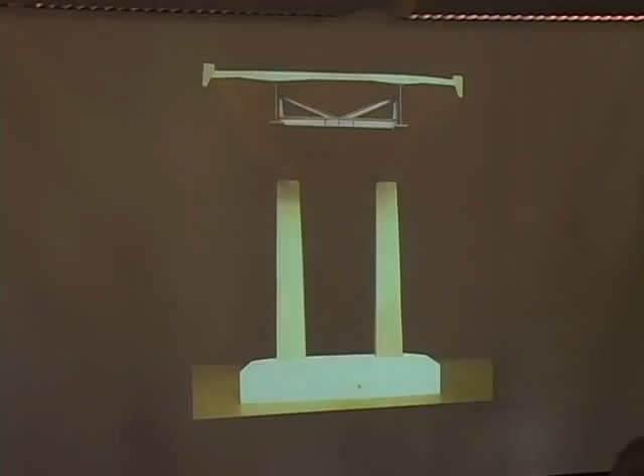Of course, we cared about detailing, but the detailing was in service of the overall concept. It was a disappointment to see the winning project, which was intelligent, cheap, and banal. It raised a public discussion, because I wanted to express that.

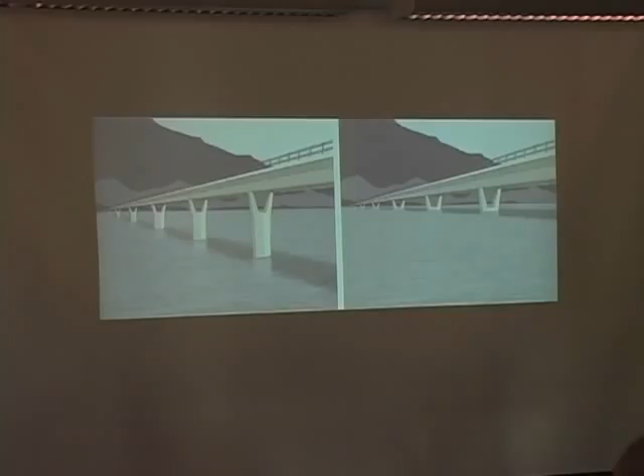And finally, they invited me to say, look, we took such a lot of care, the architect especially, of this bridge, and showed how he sculptured these pillars. And I said, okay, that's all right, but it's not dealing with the main thing. It's not coming towards the concept of the bridge. And this is embellishment of standardized structures. And that's not what is my interest.

So this was also one reason which made me fond of these 70s structures. Another thing, one of the first railway bridges in the Jura Mountains south of Basel. Here, it's not the question of big spans or the notion of transparency so stressed in contemporary bridge building. I think this bridge is like a house. It's a building at the side of the village.

And so the ornamentation of this bridge is another thing than what we have seen before. Because when you build a house, you look for the appropriate ornamentation. And that is what happened here. I think it's interesting also today to think from time to time, should the bridge frame the landscape, as we have seen, or should it be a house?

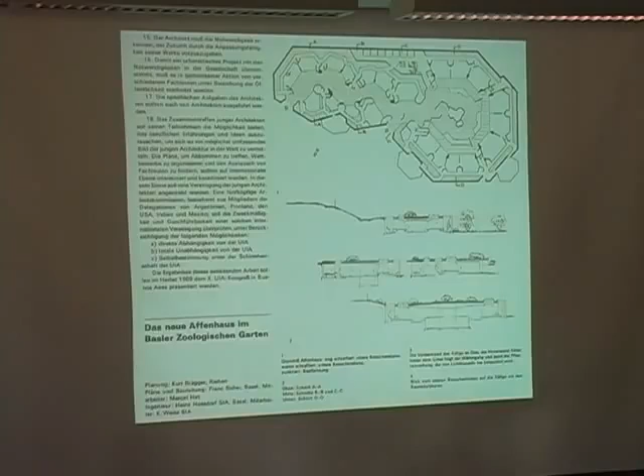There is an existing ape house built not by an architect but by a sculptor, Kurt Brägger. And this is a very interesting house. He had ideas like never come to an ape's apartment in a direct way. By using these 60 degree angles, you always move somehow tangentially towards these ape apartments. But as you see, the outside regions here are very small. And the zoo wants to improve this situation, to enlarge these outside areas. And so we were called to design these.

I tried for once to use a very methodical way. So I made sketches, I made texts. And what you see now is maybe the work of one hour. I just translated my handwritten notes. It's in German, but I can also translate that. But it's really the process how it was.

So I started with the idea of just a skeleton building, using the mesh diagonally as a stiffener of the building. But think about these apes, 200 kilos per gorilla, and they like to move things. So I didn't want to build a thing which will be set in motion by the apes. So we changed the idea to have a stiff diagonal system where the mesh serves only as an infill. But it looked wrong. It looked wrong in scale. It was too constrained, not appropriate.

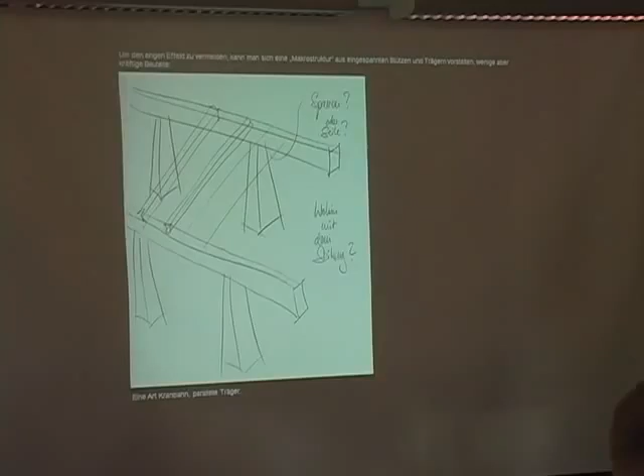So I changed to a macro structure. To say, make a few very strong elements out of it. Like frames, pillars, girders, rafters. But then why do you need rafters? It's not a house. You have this mesh. Leave this away. But then you have a horizontal tension force coming out from the mesh, so it makes sense to incline the outer girders and to anchor this mesh vertically downwards. But we have avoided the rafters.

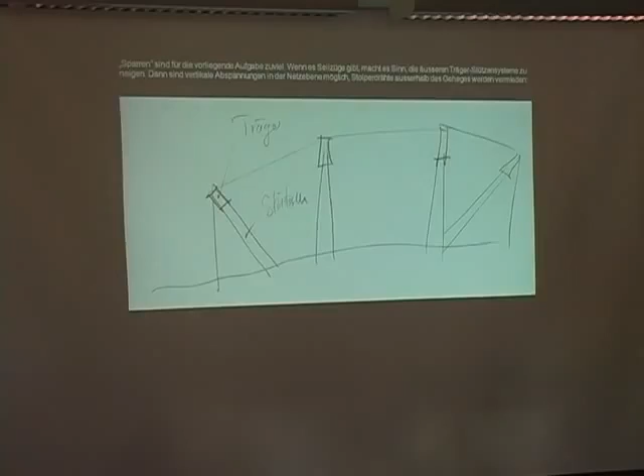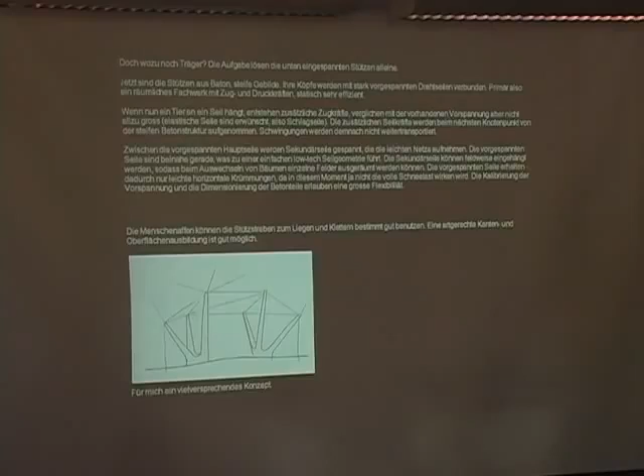Why do you need these girders? You can carry the mesh at different points. So finally, you have like fingers. You could do these fingers out of concrete. So this is a stiff element which cannot be set in vibration by the apes. And then I had the feeling that's something that works. We have come to an end. So we had to make the concept precise.

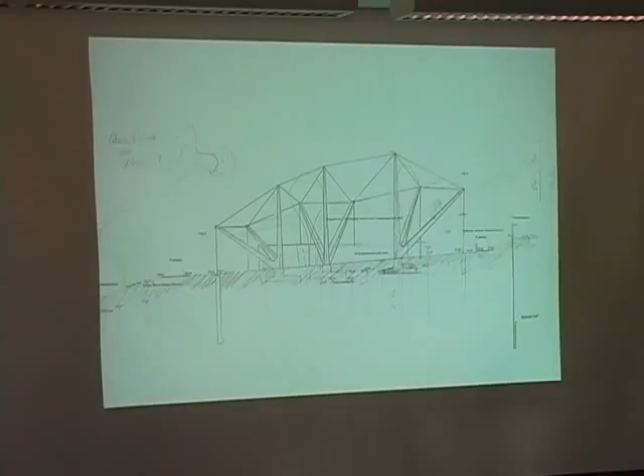We started to think maybe the apes would like these rounded areas, like seats, or they would like to climb up, or you could even think that these are like concrete bushes or things like that. But I wanted to show you that this is not the important thing. Primarily, it's a structure. And as a structure, I think it has its force. And it's not so important if the apes really want to sit in it. I'm happy if they do, but this is not the most important thing, and also not this allegory towards nature.

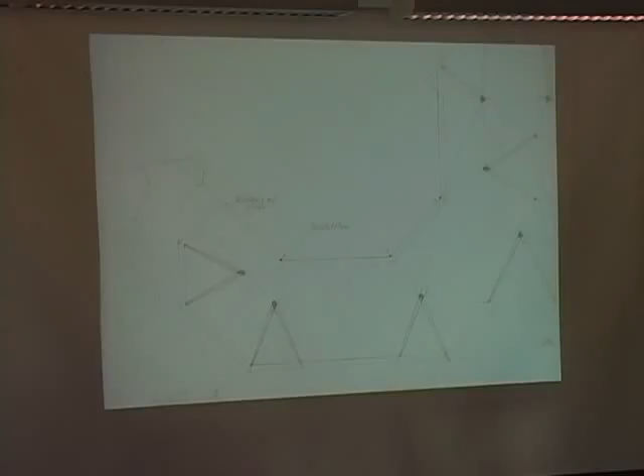So then I started to calculate, and then we started to build models, test the right position of these elements. So there was a lot of work before the so-called classical engineering work. And I asked myself if you need an engineer for doing that. I think you as an architect could have done it more or less the same way if you are interested in the physical properties, in a certain sense of appropriateness, which you also need to have. And so maybe this phase of the work is not so different from yours.

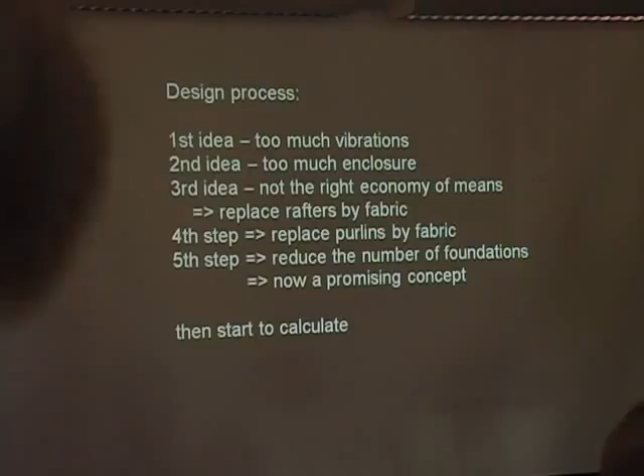Back to the Biennale exhibition. We saw a bridge built by Fritz Stüssi, an eminent steel engineer. It's in Zurich, an underpass of a road. We liked that thing because after a while it started to be really rational. Think that the Lake of Zurich is higher than the deepest point of the road. So we are inside the groundwater. So there is a concrete trough where the road leads through, and there was a high interest to make the railway bridge as thin as possible.

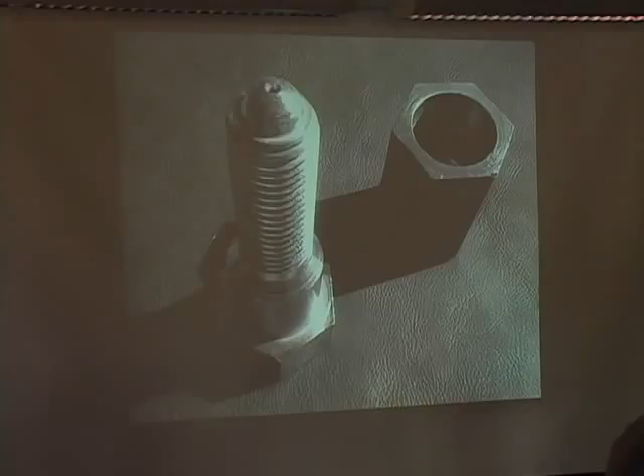And I also got touched by this work because Stüssi, he reinvented even the screws for this bridge. The screw is broader on one side, that you can introduce it to these precisely drilled holes. And the nut is at first smooth inside, that you have a longer distance to tighten the screw, which acts a little bit like a spring. Finally, you have a better performance by pre-stressing the screw.

And I mean, in a certain way, this is like Cartesian. You have to doubt about all around you, and you have to reinvent things. And this happens on an infinitesimal scale first. I mean, this absolute rationality in thought and in conception, this is like a strong fundament for engineering works.

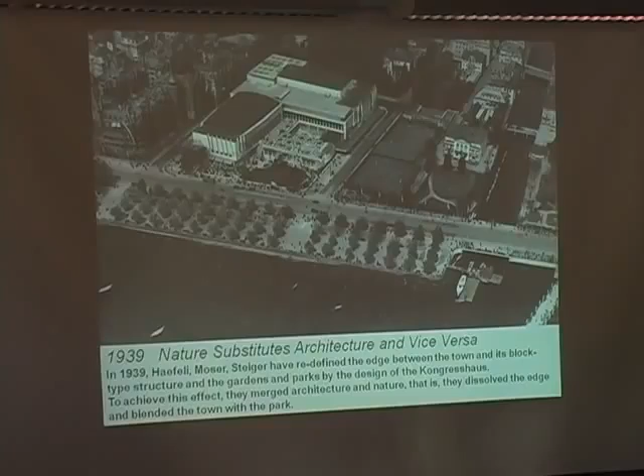And it happened that at the same time there was in Zurich an exhibition about the work of the architects Häfeli, Moser, Steiger, and in a certain way I found the same spirit in this work, especially the Congress House, which was an extension of an old historicist building with a modern, new assembly hall. And these architects realized spaces of a very undogmatic attitude.

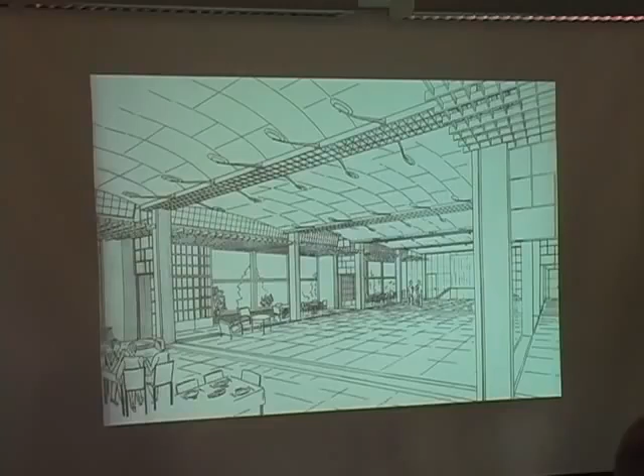And I participated with Roger Diener in the competition for the extension of this building, and we both were very affected by it. So in the mirrors you can see the historicist part of the concert hall, but look at these radical modernists, how they use decorative elements, how they take together things which maybe you think would not work together. Maybe the comparison is a bit personal, but well, it happened.

Let me finish with a known bridge, which is also based on this concept of figurative thinking. It's over the Arg River. It's a footbridge, and it was not possible or allowed to put pillars into the river, and also they did not want a suspension bridge because ropes would be fatal traps for the birds. So it was only a stress-ribbon bridge that finally worked, and we built a three-span stress-ribbon bridge.

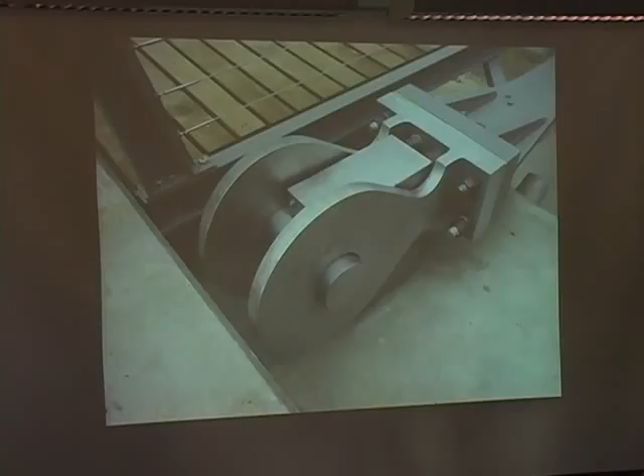The middle span is about 80 meters, and we use these inclined concrete struts to shorten the span as far as possible, and also for getting a better longitudinal profile, because the side spans go down. It was not necessary to heighten the dams a lot with this concept. What you see is that the elements of this bridge are clearly articulated against each other. You see the big hinges. Probably it's the first stress-ribbon bridge with hinges.

We use these hinges to avoid fatigue stresses in the steel ribbons. And as these parts are moving, you cannot paint them. So it's stainless steel combined here with usual black steel. And there is an electric insulation in this joint to prevent the whole from corrosion. In a certain way, these hinges became the emblems of this bridge.

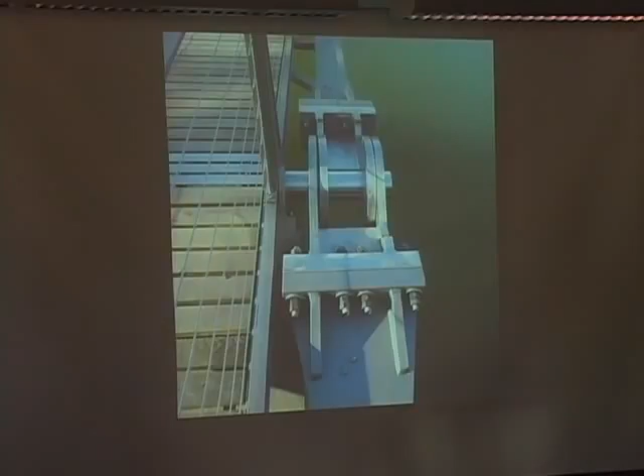And we only dared to make this bridge so light because we wanted to introduce vibration dampers. But now we found out that these dampers are not necessary, maybe because of these hinges: the walkers coming along see there will be something moving, they are aware of that, and then it's not a problem.

An interesting thing, which I was not aware of at the beginning, is that the bridge somehow does the same thing as the trees around. The trees are also leaning to the water. And again, I think structural engineers should not imitate nature. But it happened that the trees look for the light and the bridge wants to shorten its spans. And this led to almost the same reaction on the landscape.